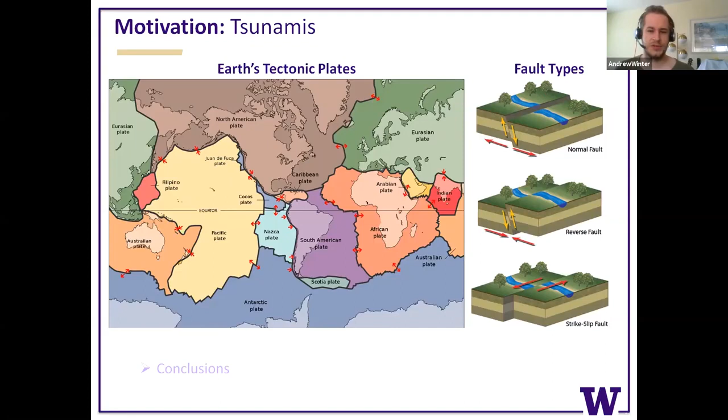So to begin with, what is causing tsunamis? I'm sure you all know, Earth's tectonic plates. And in particular, reverse faults are the main culprit of giant subduction zone type earthquakes that cause tsunamis. 88% of the world's tsunamis are caused by this type of earthquake. The remaining ones are mostly things like subsea landslides or even subaerial landslides coming off of a mountain down into a lake, usually.

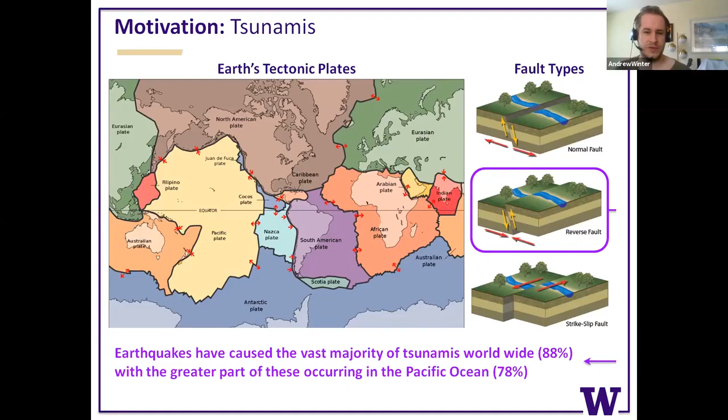But most of these occur in the Pacific Ocean, which is of concern to us where we live on the West Coast at University of Washington. And homing in more on that, the Cascadia subduction zone here, which stretches from Vancouver down to California, is the big issue in terms of potentially causing a future tsunami.

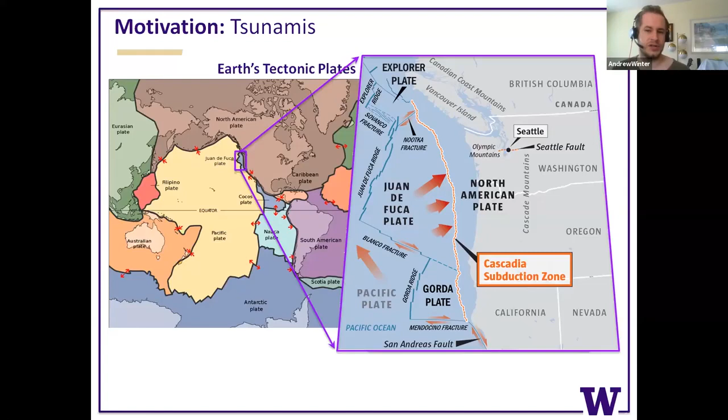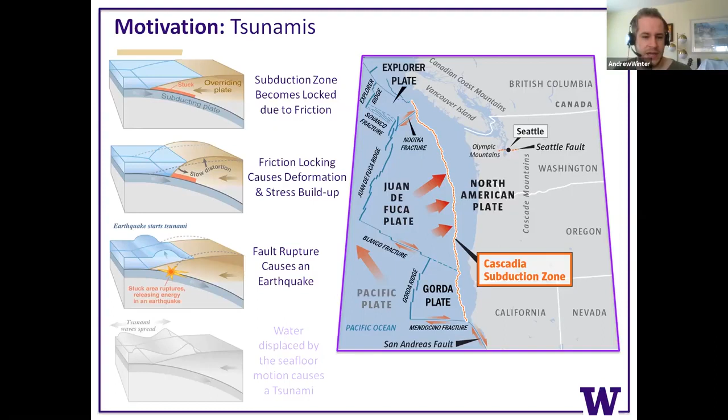As research shows, every roughly between 500 and 600 years, a giant magnitude 9 level earthquake should occur that would cause a disastrous tsunami. And since this fault takes so long to repeat causing an earthquake at that level, as this process goes on, the zone becomes locked, which geologists are measuring all the time to determine how much of it is locked. As this locking occurs further and further, the friction causes deformation and stress buildup in the plates of the earth. Eventually it slips and gives way, or maybe some partial fracturing of plate material at the interface. And finally, since the water is displaced, it moves outward from there as a tsunami, perpendicular to the fault. At the ends, you get more fringe, radial, circular propagation that's not as bad.

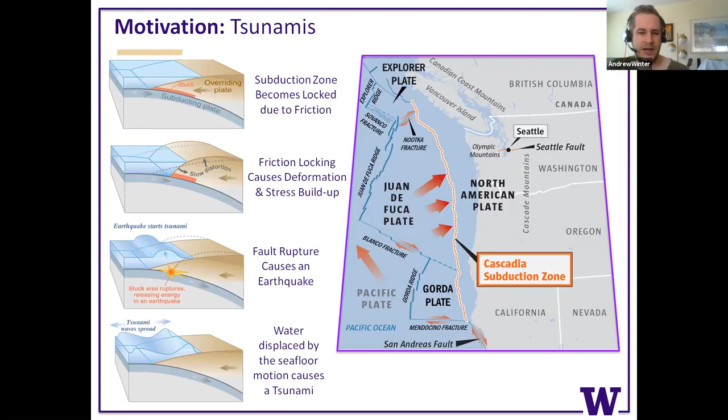In terms of what this can do to communities, these are some examples I have here from 2004 and 2011. You can see on the left tsunamis in conditions like this, where it's not such an urban environment. They completely wipe the map clean of all vegetation, and they ravage the coastline and completely change its profile. Also, lots of seawater is left behind on what could possibly be arable land, so it's hard to use, and all the small structures are completely wiped down or wiped off the face of the earth there.

Also in Japan, in the harbor here, you can see only a few of the larger, more strongly reinforced concrete type structures have remained. All of the other small timber or light frame steel structures have been completely knocked down by the inundation. So what we're aiming to understand is whether a small building that wouldn't withstand the tsunami on its own, if positioned behind one of these big buildings on the coastline, could survive if designed adequately for those loads.

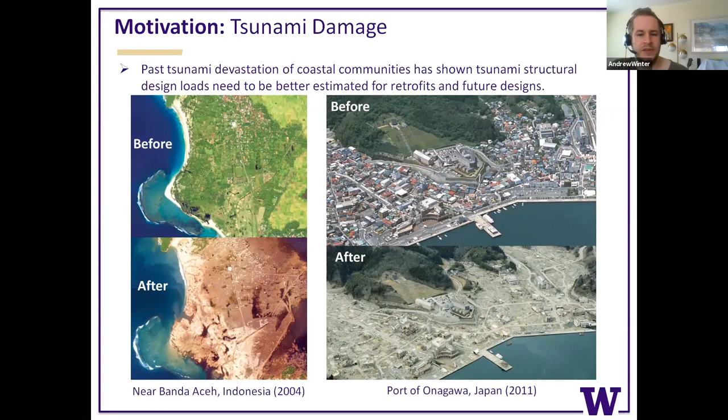Some people have studied this before. It's in ASCE 7 as of the last release, 7-16. However, the force amplifications provided there are not part of the main code. They're in the commentary, so it's not required for your design.

The other thing is there's no treatment of shielding effects—one structure hidden behind another, like I mentioned. That would cause a force reduction that could be very valuable in assessing whether your structure is going to still be there or not.

Channeling effects are considered in the code, but they only consider very symmetric configurations of structures. You can see on the bottom left, these little blocks in the yellow boxes are perfectly arranged on a grid, symmetrically spaced away from the test structure further onshore in the purple box. The same thing appears on the top right, where two symmetric flow blockages were channeling the wave toward a central structure.

So the things we aimed to do in our experiments were go beyond perfect symmetry conditions and also consider shielded conditions, to come up with a comprehensive design equation based on numerical model parametric study results.

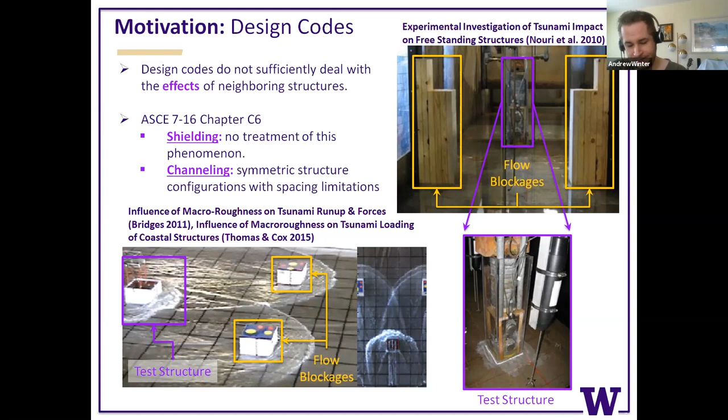Diving into the experiments, we wanted to determine flow shielding and channeling effects from our experimental data. So we went to Oregon State's Large Wave Flume in the Hinsdale Wave Research Lab.

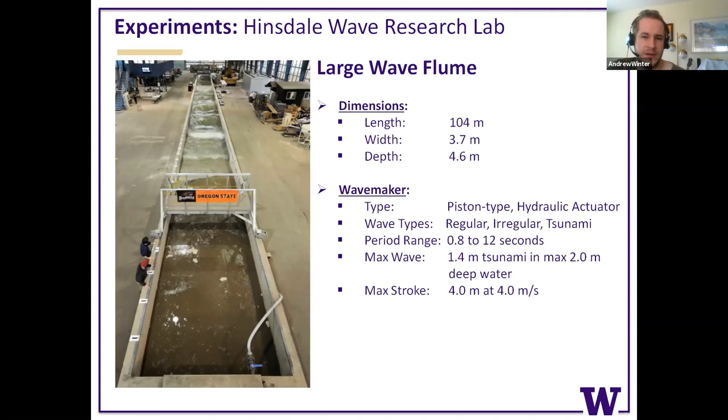We used a test structure borrowed from a previous experiment—a steel box with a reinforced frame inside. Even though it has a reasonably thick steel gauge plate on the wall, the frame makes it more rigid, so you're getting more of a fixed structure response rather than a very flexible one.

We had an array of locations where we placed pressure gauges in little taps along the sides of the structure.

Also above, there was this support frame that spanned the flume channel like a bridge. The overall top part connected to the walls, and this bottom part in the middle allowed translation in the wave propagation direction. There are two sets of frictionless slider bearings, so you can have translation either in the streamwise wave direction or in the transverse alongshore direction.

So hopefully we're isolating just the loads in those directions, barring whatever kind of friction is actually in there, since realistically there has to be some.

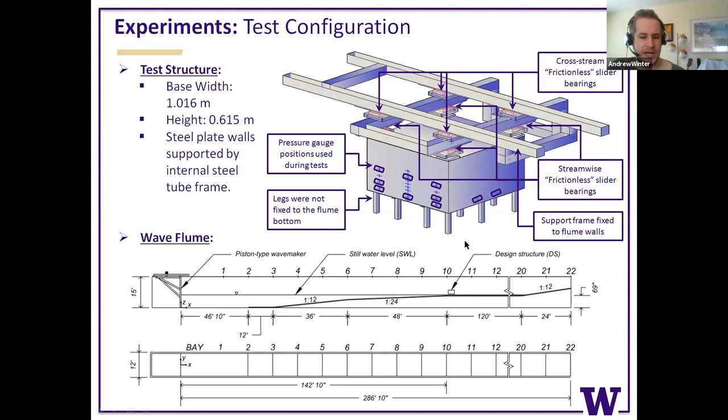You can see here our profile for our experiments. We had a two-slope beach coming up to a flat ground area, and the structure was supported on legs, which later in numerical modeling we ignored for simplicity's sake, so the mesh wouldn't have to be too tiny in too many places. But we'll talk more about that later.

The other thing is our measurement gauges. We used acoustic Doppler velocimeters to get the velocity field of the incoming wave. We also measured the free surface elevation with ultrasonic wave gauges and traditional wire wave gauges along the length of the flume and surrounding the test structure. All of these were used for numerical model validation later.

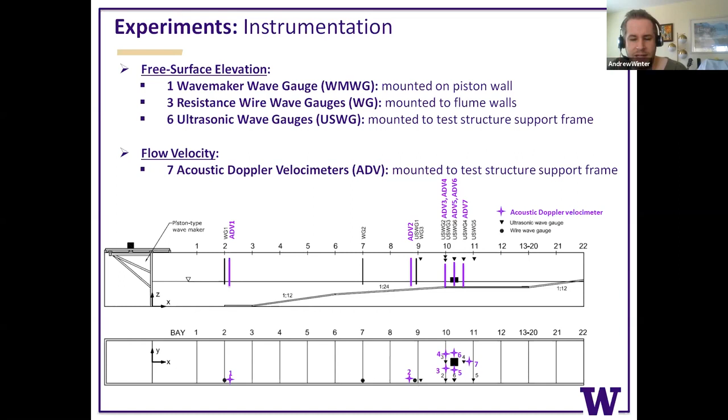You can see here where they're placed, surrounding the structure. The pressure gauges were concentrated mostly on the front of the structure because we were concerned about the wave impact in the streamwise direction, initially on the front. But we also placed gauges on the sides, the bottom, and the back to assess any twisting that might occur from asymmetric loading on the left or right, uplift on the bottom, and a resisting force on the back from water there.

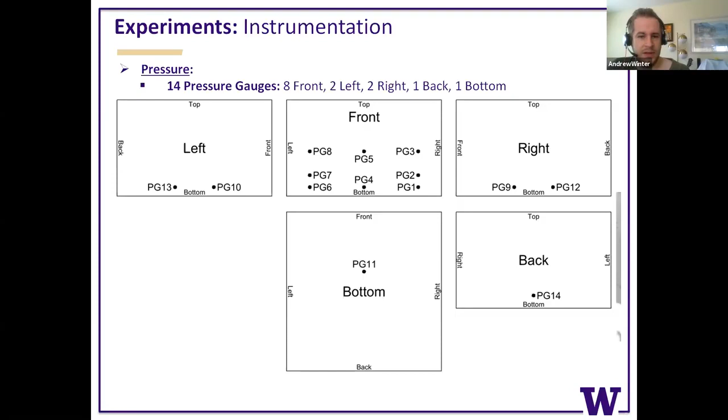You can see inside all of the wires coming in through here to the top to all of our gauges and our load cells. We did have leg load cells to measure loads on a couple of the legs, but they were so insignificant compared to the total load, we didn't really use those results.

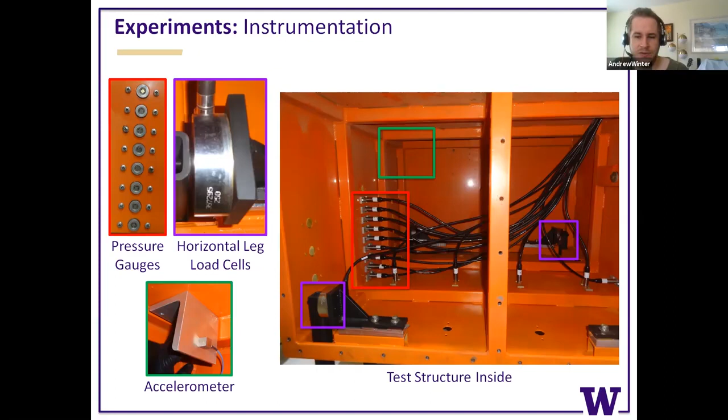We used the net streamwise force, which was measured by the back load cell. Then we had 2 load cells on the side attached to part of the frame on the right side. We also had 4 vertical load cells attached to the roof of the structure, so you could measure overturning and twisting in any direction as well as the vertical force.

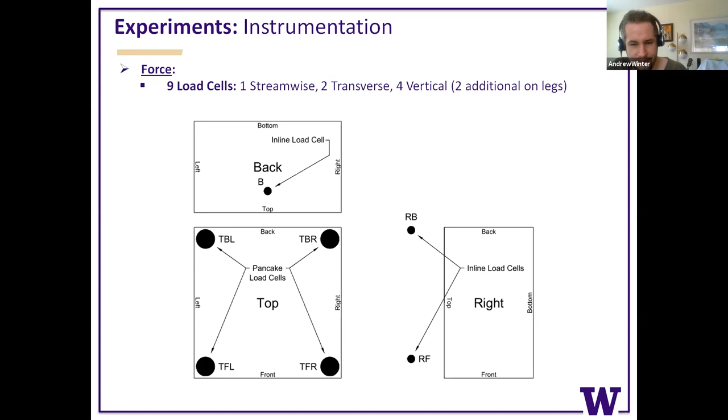We tested 3 wave types in total, but we neglected one of them because it was breaking right on the front of the test structure, and it seemed highly unlikely that would ever happen in a real tsunami situation. So we stuck to mostly testing these 2 waves, an unbroken wave and a broken wave, which maximize different aspects of what the wave maker is capable of in the Hinsdale Wave Research Lab.

The first one, the unbroken wave, you're getting the maximum piston strokes and the longest duration of inundation. Whereas the other one, the broken wave that we created, had reached the max velocity of the piston wave maker, but we were not able to hit the maximum paddle displacement due to the physical constraints of the wave maker — we didn't want to break it.

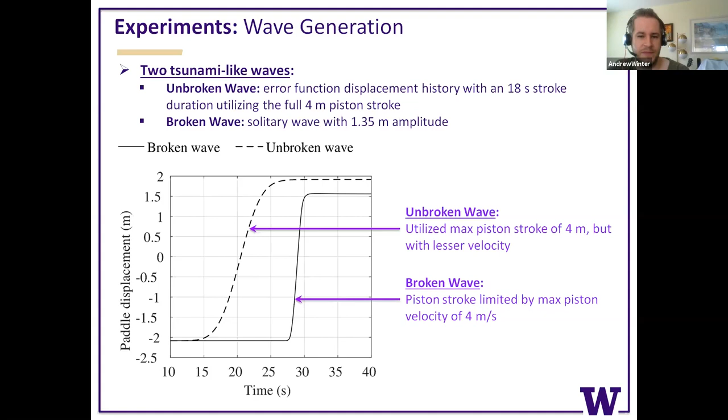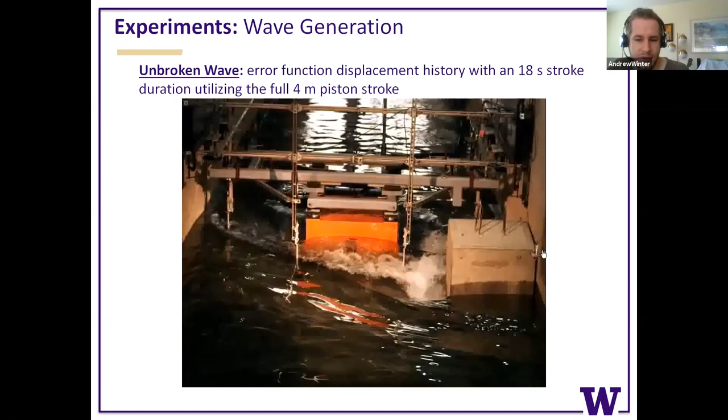Moving on to the broken wave, this one is going to come in as a fully broken bore already. The wave is broken halfway between the wave maker and the test structure to ensure that it's like a broken tsunami bore. It should be coming in the bottom here any moment.

Apologize for my colleague not hitting record earlier. Here we go.

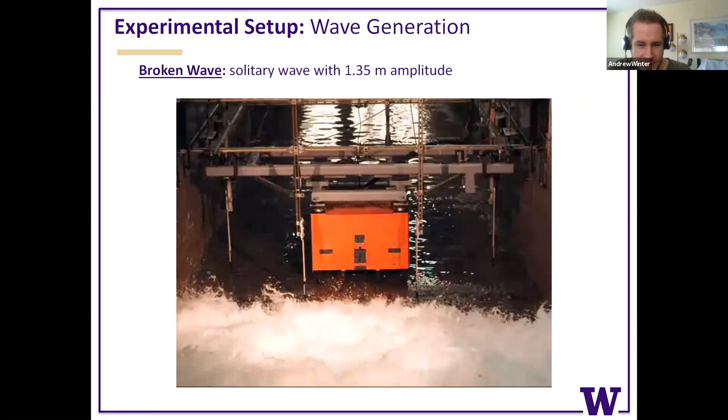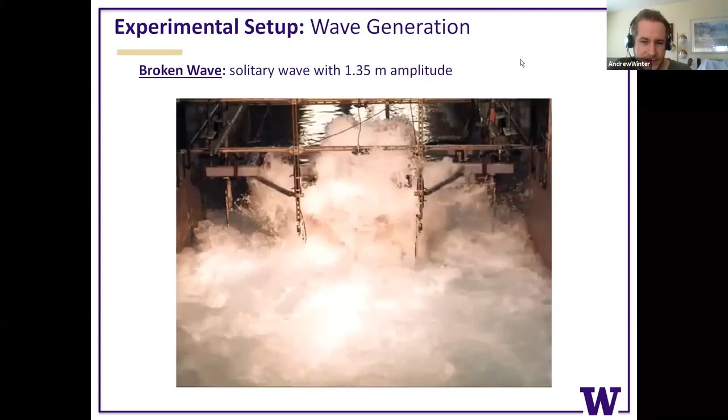Here comes in the big frothy broken wave, and this caused a huge slamming load and lots of splashing, which ended up being problematic for our ultrasonic wave gauges — you can see my mouse is right here, and the splash definitely douses it. We'll talk more about that later in terms of how that came out for our free surface measurements, but yeah, that's that wave.

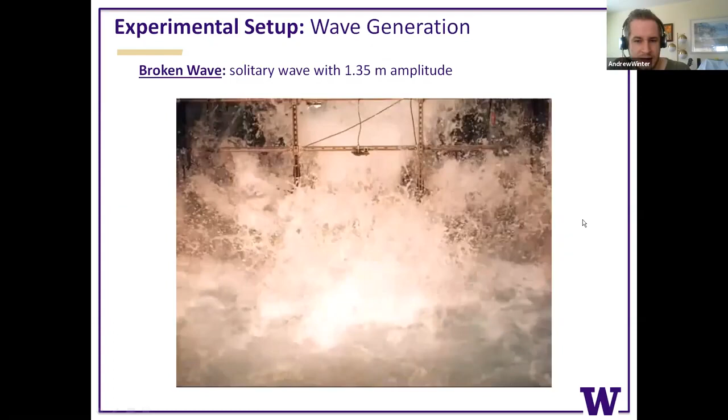The wave is going to get redirected at an angle a little bit away from the structure that it impacts first, the concrete block. So it's not going to hit head on the test structure as much as it normally would.

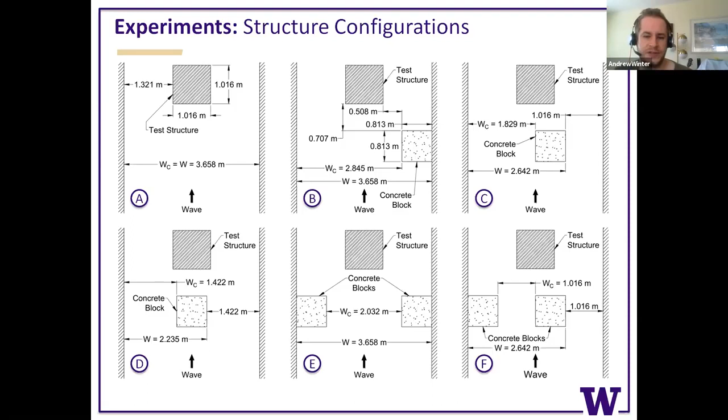Cases B, C, and D give different levels of blockage of the flow channel, and case E would be like a perfectly channeled case. So case E, you should expect to match ASCE results very well — same with case B, since it's not actually shielding the structure. But cases F, D, and C, where there is at least some shielding, if not full shielding of the structure, you're going to expect to see a much different result than what the code predicts.

The other thing is we then did regressions of the pressure field data to figure out these surfaces, which were used to calculate the force.

One thing that's a little confusing is that in each of the images of the test structure, the orange block and the gray concrete blocks, the horizontal or transverse y-axis is flipped from what it should be. So for instance in case F, you might wonder why the value is really high on the right side when it looks like it should be higher on the left side where there's no blockage. That is true, it should be flipped. This was just a relic of past figure making.

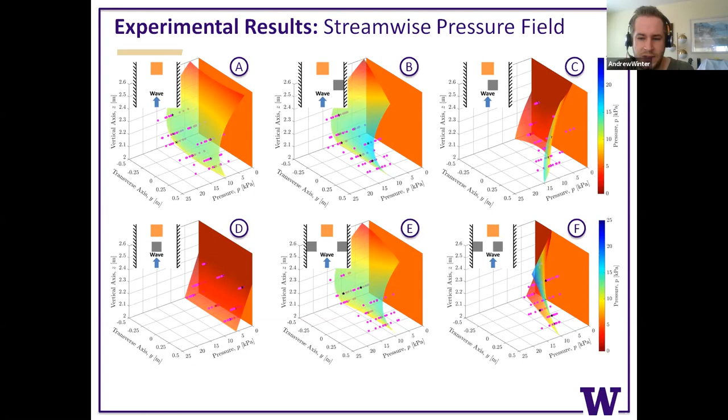But you can see all of the cases with shielding, like D, C, and F, definitely cause very large reductions in the localized pressure field. You also get things like in case F, where the channel between the two closely placed structures causes a very large increased velocity, and you get a very locally huge pressure field compared to the base pressure field, like if you look at case A. So we were trying to capture all of these effects: amplifications in pressures and forces due to channeling, and reductions due to shielding.

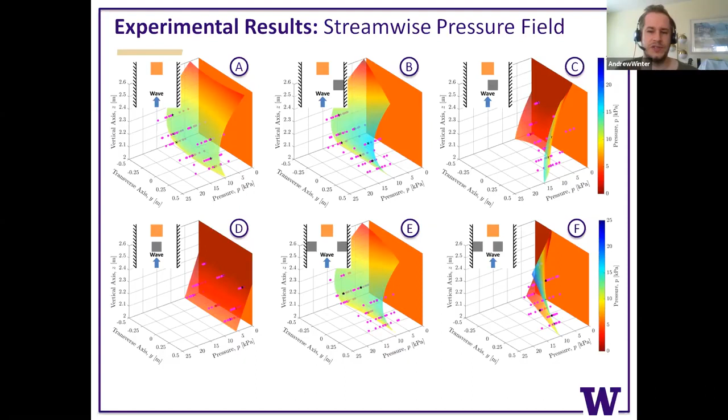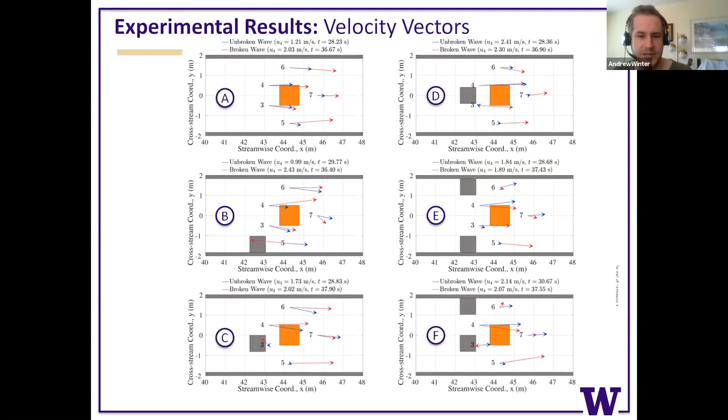You can see in a number of these cases where there is some channeling due to the neighboring structure, for instance case C and case B, you could compare to case A very readily and see that the broken wave velocity, which is of most interest since it's most like a tsunami, definitely got much larger. So not only did the forces and pressures experience amplifications, you can see it very directly coming from the velocities as well, which makes sense since the dynamic pressure depends on the square of the velocity.

Getting into what the code says about this, this was some research by Nouri in 2010 from University of Ottawa, which I believe was one of the experiments cited earlier in the slides. They developed a curve that tells you a force increase ratio based on how much the channel is blocked, but they also placed a bunch of restrictions on the distances between things in the configuration.

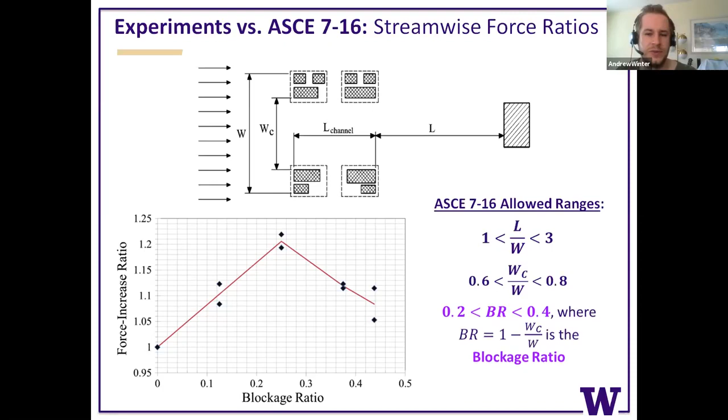For instance, you have to have a large enough separation L between your structure and the channel. Also, there's a restriction that the blockage ratio must exist between 0.2 and 0.4, which doesn't seem as widely applicable as you would like for a design equation. So we attempted to expand beyond that.

Just comparing the experimental results alone, you see, as I was mentioning, the unshielded cases B and E, where there's no gray concrete block directly in front of the orange structure, performed exactly as you would expect according to the ASCE results. Whereas anything with shielding at all, C, D, or F, was drastically reduced in terms of its ratio of force versus the case without any blockage. So this is what we're attempting to capture in our equation eventually.

Also, by doing that, we're going to expand the range in which our equation is applicable. We attempted to do a much wider range of distances, so very close structure patterns and very separated structure patterns, so you can have a very widely applicable result.

So just the conclusions of this: you get greater than 50% reduction in force for only 50% shielding of the front face of a structure. And in channeling, more or less, you just get increases due to higher velocities from a Venturi-like effect between pairs of structures or between the wall of the flume and a structure.

The other thing to note is even if you get a channeled velocity that's higher and could cause a higher force, it needs to be more directly aligned with the structure. For instance, case E has a larger force than case F by far, because case F may have channeling and a higher velocity than E even, but it's not directly aligned with the orange structure, so you're not going to get the full impact on the structure.

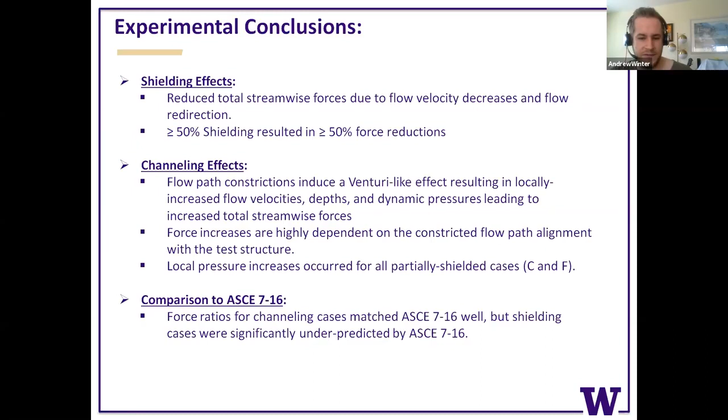So after we did all this, we wanted to develop a numerical model we could use for parametric studies that would expand beyond the range of conditions, so we could develop a force equation that was very widely applicable. For this work, we chose to use a 3D Reynolds-averaged Navier-Stokes CFD solver code and try to replicate our measured tsunami loads and free surface elevations as accurately as we could.

We used the OpenFOAM software library for this. It's a finite volume method-based solver using the volume of fluid method for free surface tracking, so it's a two-phase air-water type model.

Additionally, on top of OpenFOAM, I used work from Pablo Higuera, who I believe is at University of Auckland now -- he was from IH Cantabria in Spain -- and he developed during his PhD this Olaflow package, which is basically a coastal engineering add-on to OpenFOAM.

That allowed very easy implementation of the wave maker boundary condition that I needed.

For turbulence, we settled on using the K-omega shear stress transport model developed by Menter, I think in '92, for its ability to deal with extreme flow separation off of a bluff body like this box. We'll talk more about that later.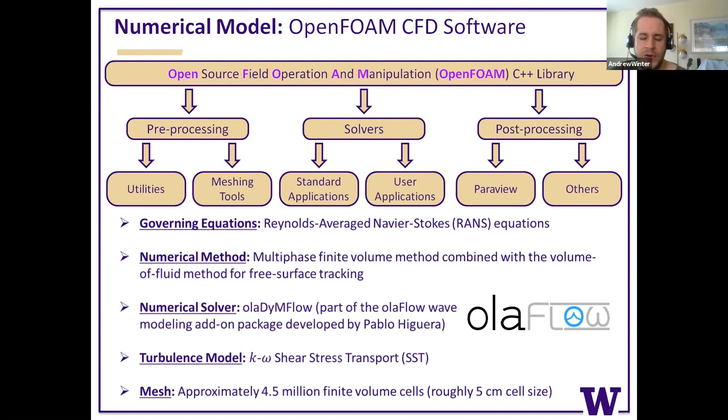In terms of how numerically expensive this is, we used roughly 4.5 million cells per case, so they weren't that bad. We could run them on about four nodes with 16 cores each, which is what I did all of my jobs on, more or less.

The main criteria for setting up a good model, which took the vast majority of my effort during my PhD, was getting the mesh right. And getting the mesh right involves reducing the non-orthogonality and the skewness of the mesh.

In the bottom right here, you can see the worst possible case: there's a difference between the cell edge center and where a vector connecting the cell centers crosses that line, and you also don't cross that line perpendicularly, so that's bad. You want it to be like the top left, because all of the finite volume schemes in these codes were derived assuming that this type of condition is what you were working with.

They didn't imagine you were going to do these free meshes that were so crazy. OpenFOAM does have internal correction factors to deal with this, but they're only going to get you so far -- you want to avoid this as much as possible.

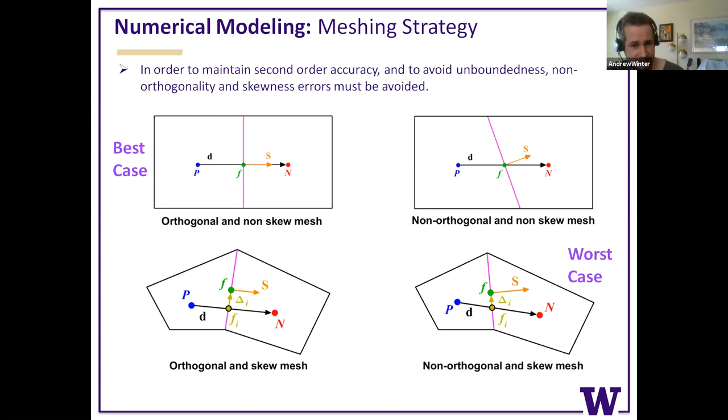So to do this, this is my meshing scheme in the flume, chopped up into 3 chunks here. The initial part, the horizontal dynamic deformation, is what the Olaflow solver is doing -- it's moving the left wall according to the piston wavemaker time history of displacement, and that part of the mesh gets squished.

That's why if you look at the delta X of those cells, it's a bit larger than to the right. So by the time it's done getting squished due to the piston wall motion, it is equivalent in size to the ones to the right, outside of the red region.

In terms of refinement, I used uniform grading from the atmosphere and from a lower boundary in the flume up to the free surface, to get nice refinement where the wave is going to be passing through and have good resolution there.

Horizontally, I graded it from the end of the first beach slope toward where the structure is going to be, in the purple region, and then expanded it again toward the end of the flume where I don't care about the solution being as refined. I just want to reduce my cell count, since that's after the wave has broken and hit the structure. Initially everything started from 10 centimeter size, and this is about a 100-meter flume roughly.

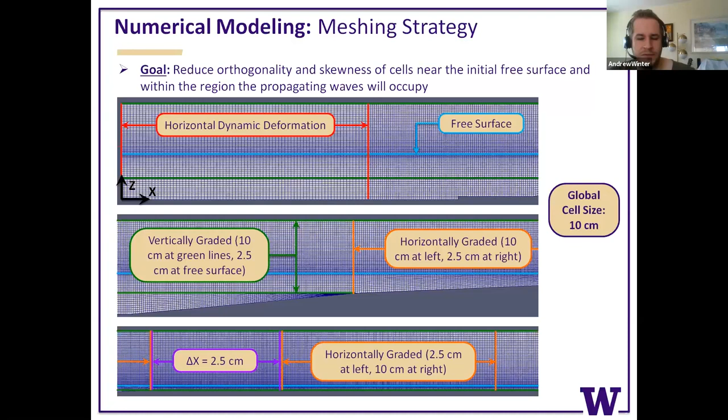This is just a close-up of what the structure ended up looking like. This is the concrete block in case D, right in front of the test structure, just as an example. So it goes all the way to the ground. The test structure behind it does not go all the way to the ground, and I did not model the legs. The proportion of the load on the legs was so minimal compared to the overall structure that we opted to reduce the numerical solver time and complexity of setting up the model by eliminating the legs, since the mesh would have to be so much smaller to conform to their shape.

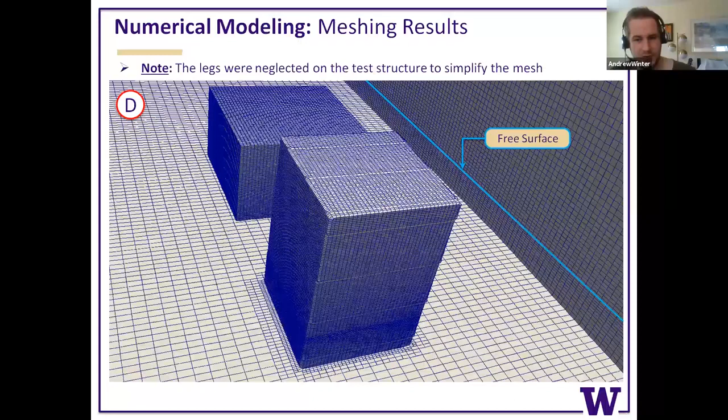In terms of setup of the model, getting your initial conditions is very important. In particular, the turbulence modeling aspect of setting up the numerical solution was one of the more difficult parts to get right, in addition to the mesh.

I did this by taking experimental measurements from as early as possible in the wave. The first ADV, acoustic Doppler velocimeter, along the length of the flume, took measurements of the velocity histories from there, and then we calculated the ensemble averages. That's what the green U, X, and U, Y in the little angle brackets are.

Then for turbulence, you care about the fluctuating velocities. So you subtract the mean from the total, and you get the turbulent quantities. Then you can calculate your turbulent kinetic energy, which is just 1/2 times the sum of the squares of the velocity components. Also, in most of these models, they're 2-equation models, so you have to have the dissipation rate as well, the epsilon value. This is just an equation from turbulence theory, so you plug in your numbers and crunch it out.

Finally, for the K omega SST, you need the omega value, the turbulence frequency, which again you calculate from your equation from theory. The one or two big assumptions in all of this were that we neglected the Z velocity due to extremely noisy, erroneous data measured by the ADVs, and that in the initial part of the wave, most of the motion is purely horizontal translation.

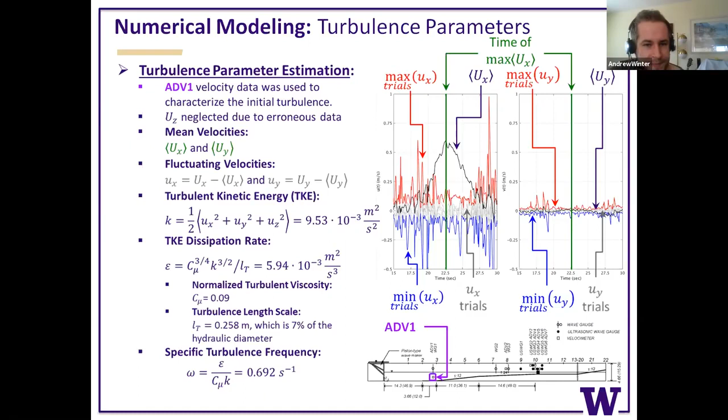In terms of which model we used, we did test a range of models to see which gave the best results. In previous research I had done on bridge structures, the standard K-epsilon model worked very well. But honestly, after doing all of my PhD research, I feel like that was a bit lucky and a fluke, since this model can't handle flow separation well, and it over-predicts the turbulence kinetic energy, the K value, in stagnation regions. So on the front of the structure, where the wave is going to impact right in the middle, the K starts to build up and gives erroneous answers.

So that's not a good model to use. We also tried the K omega SST and the nonlinear realizable K epsilon models, which are available in OpenFOAM, and they gave very good magnitude results, but the nonlinear realizable one was off in time. So we selected the K omega SST.

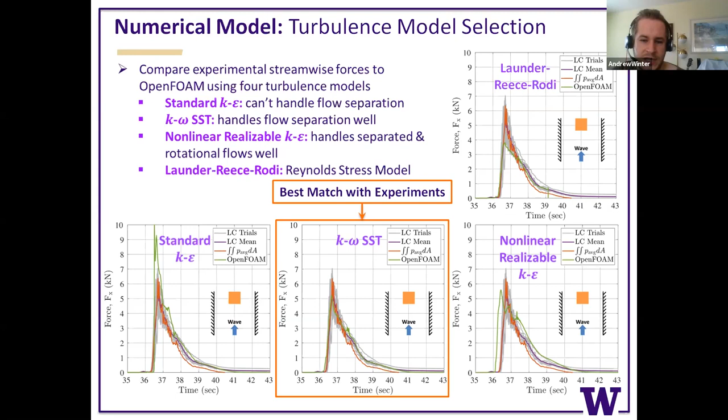The one big disappointment here was the Launder-Reece-Rodi model, which is a Reynolds stress model, theoretically more physically correct than any of the others. There are more approximations built into these other three models that are used. The difficulty though is getting the initial conditions correct, and you have to make some assumptions unless you have a lot of measurements, which we did not have. So the assumptions did not work very well, and I would recommend sticking with K omega SST for applications like this.

Here's a little sample of what OpenFOAM can do for you. You can see on the left, the wall moves and creates the wave. This is the broken wave, and it comes in, and right about here it's more or less a fully broken bore, with impact on the structure. All of these visualizations were created using ParaView, which is also free software.

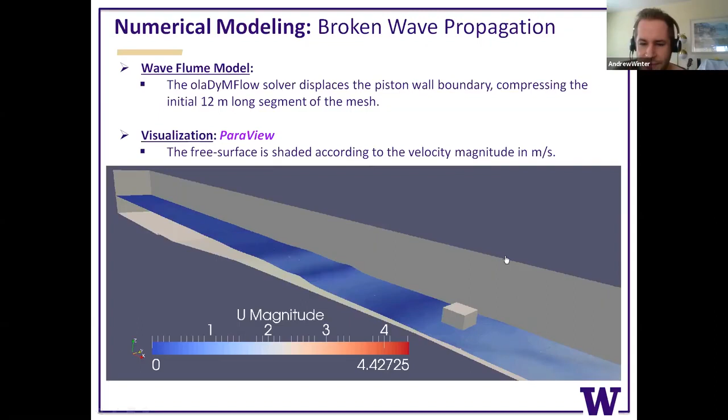Here's a close-up from the front. The wave comes in just like the video from the experiment earlier, and you can see a very similar result, which makes sense since the forces we got were very similar.

Comparing the experiments to the numerical values, in this graph the green is OpenFOAM, orange is the integration of the pressure gauges, and the purple line is the mean of the load cell values from different trials in these configurations. The gray lines are all the different trials of the experimental results, plotted to show you the range of experimental variability.

In all of these, the OpenFOAM curve at the peak, which is the main value we care about since we wanted to estimate the maximum impact force as best as possible, is definitely within the gray range of variability, and also comes out quite close, especially in A, B, C, and E, to matching between the numerical and experimental results.

You can see the free surface on the right, looking at the unbroken wave over here as an example, which also looks very realistically similar in terms of the elevation it reached on the structure.

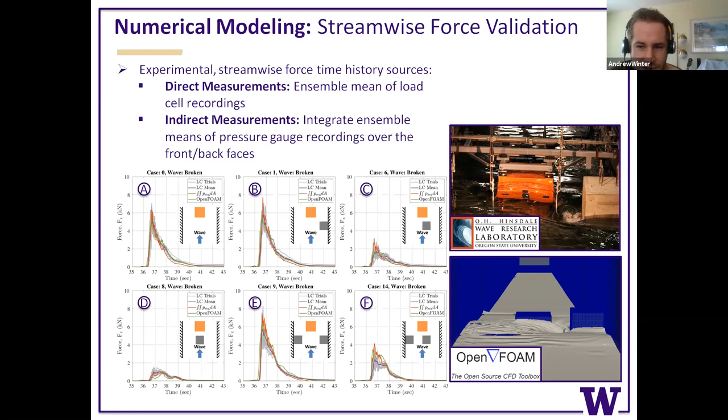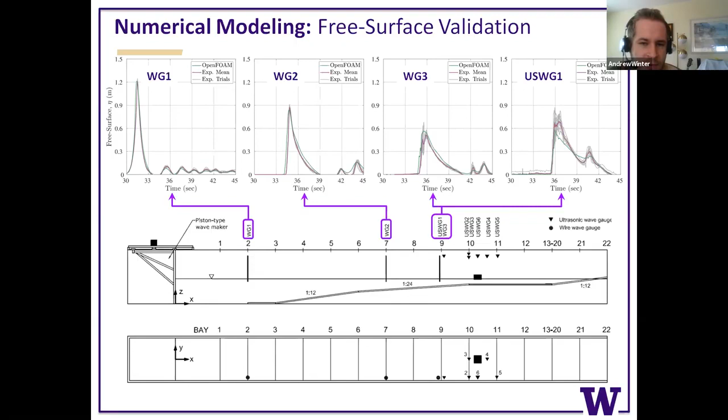As I was mentioning, in terms of free surface elevation, you can see here as the wave is propagating along the flume, OpenFOAM - the green, purple, and gray curves - match quite well.

Near the structure it also matched quite well, but it was much more difficult to compare the experiments to the numerical results due to the splashing that I showed you earlier in the broken wave video.

You can see in the front, all of our recordings at that ultrasonic wave gauge were completely corrupted, and the values were like infinity or 0 or negative 1, things that made no sense.

I tried to salvage some of the results you can see at gauges 2, 4, and 5. But even though most of them were okay, there's still some erroneous results that messed up calculating the average.

Although you can see the green curve fits through the experiments everywhere that those spikes in the data are not occurring. Even behind the test structure at gauge 6, there's quite a good match between OpenFOAM and the experimental result, which I thought definitely showed that the turbulence model is doing its job - in a flow-separated region, things are still coming out pretty accurately.

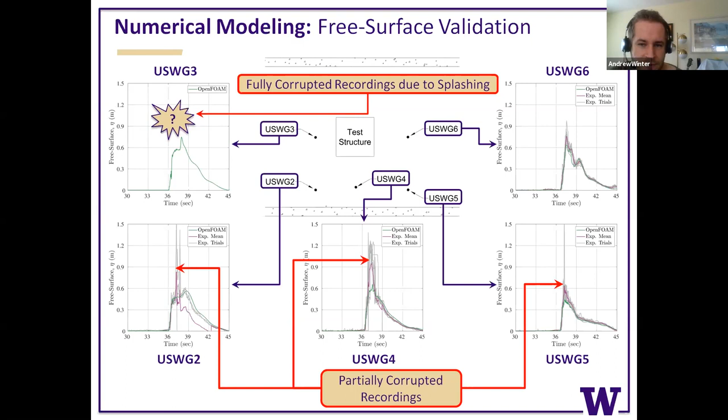So overall, as a conclusion here, using the 10 centimeter global cell size was good enough, and reducing it down to 2.5 centimeters wasn't necessary - you're not trying to resolve super fine boundary layer results here. To get the net impact force correct, you don't need to go as fine. That would be, I think, one of the big takeaways.

Also, out of a lot of the standard turbulence models that you might use on this problem, the K-omega SST model was the best option.

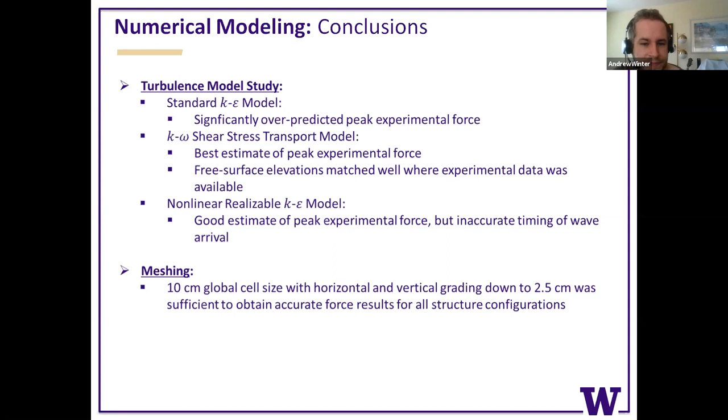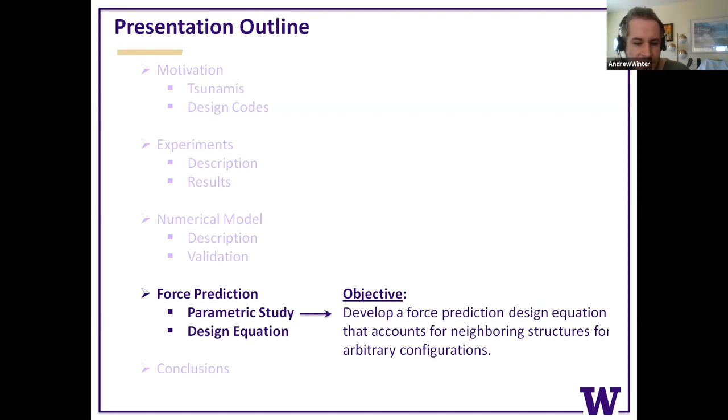So for developing our force prediction equation, what did we do? We took this validated model and started moving the neighboring structures around in space to get a bunch of results that we could then use to figure out a design equation for the streamwise force. Our goal was to vary the location of a neighboring structure here, the gray blocks, relative to the design structure or test structure, the orange box.

So we just chose a wide range of X, Y coordinates here, which define the back position of the neighboring structure relative to the design one and the alignment of their center lines.

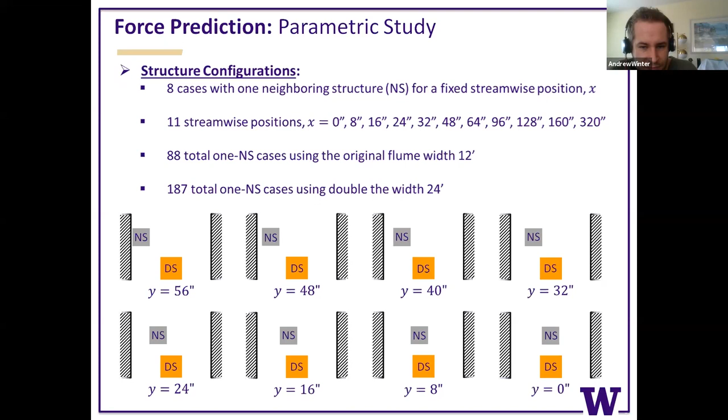We had 88 one-neighboring-structure cases, and we also had 187 more cases where we doubled the flume width to see if the walls were having any effect on the simulation, and also on whether the experimental results were accurate or not.

Our concern, expressed in an image maybe better than my words, is that if you have a neighboring structure near the wall, you get flow behavior that's not necessarily the true flow behavior around a neighboring structure with no wall over there. In real life there wouldn't necessarily be a wall if the neighboring structure is supposed to be the only thing changing the flow. Since there's a stagnation point at the corner of the neighboring structure and the wall it's touching, it's effectively, in concept, like having a double-wide neighboring structure.

So we were concerned how different the forces would be if you took away the wall. We doubled the flume width to move it far away to the left and right, and see what would happen to the results, just to test if our results are realistic enough or not.

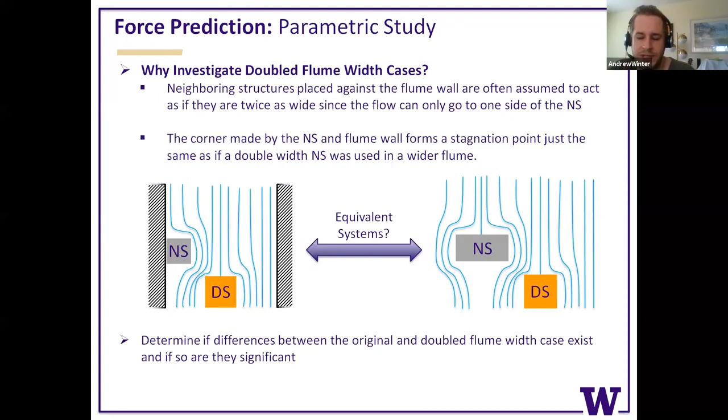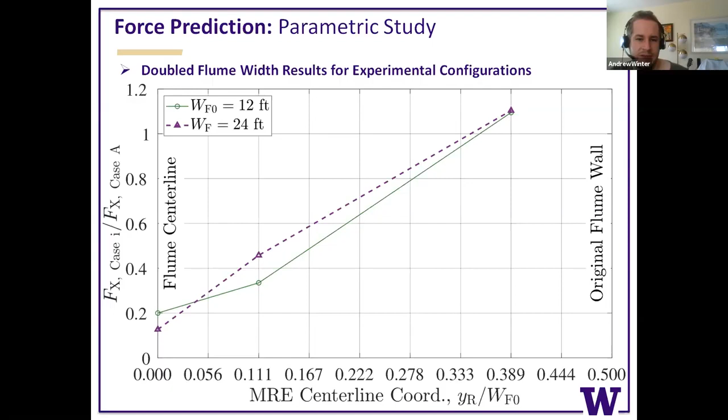To do that we needed a very large range of high-performance computing resources. We used local resources at the UW - Hyak is our HPC cluster there, and I used 4 different queues within that. Also at TACC, I made good use of the SKX normal nodes to do 2 neighboring structures. Those results aren't presented in this presentation, but we're currently working on augmenting the design equation to account for 2 or 3 structures.

So we ran a lot of different cases. What might be important to you is that on TACC it took 1 to 3 nodes, 2 to 3 days, to run these 4.5 million cell cases. Hyak is maybe not as relevant, but it was a similar number of nodes, just slightly longer time.

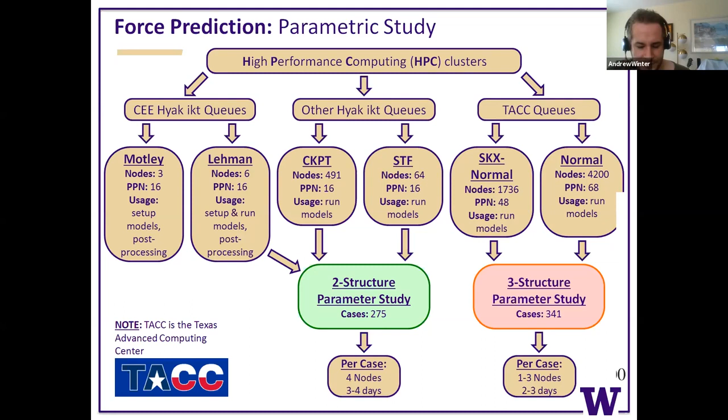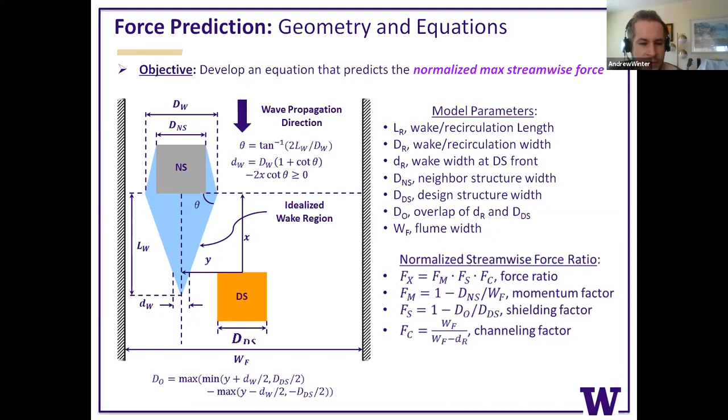What did we do with all of this data? Like I said, we wanted to get a wake width and a wake length - those were the two unknown things in the geometry, going back to our configuration of the structure. We didn't know the width and we didn't know the length of the wake, and we let error minimization of the forces between the prediction equation and the OpenFOAM results help optimize those.

So what we did was we ran a least squares sum minimization of the error of the force difference between the model equation and OpenFOAM, our validated OpenFOAM model. We found that the ratio of the wake width divided by the size of the neighboring structure, which is what these R numbers represent, came out to be around 1.2 to 1.1, and about 4 to 5.5, depending on whether you had the original flume width or the doubled flume width.

We wanted to pick nice engineering values that didn't have too many decimal places, but also encompassed both of these results quite well, whether you have a wide or a skinny flume. So we opted for just picking 2 values, which we'll show on the next slide.

But I wanted to explain here first, before we dive into a bunch of curves, how are we presenting these results. Each of these black points represents a case, a different configuration, and those are the actual OpenFOAM results.

The dashed lines, the blue, green, and purple, represent different factors. The green is the shielding factor. The blue is the loss in the momentum factor, and the purple is the channeling amplification of the force factor. The red is the product of those 3, the total force factor.

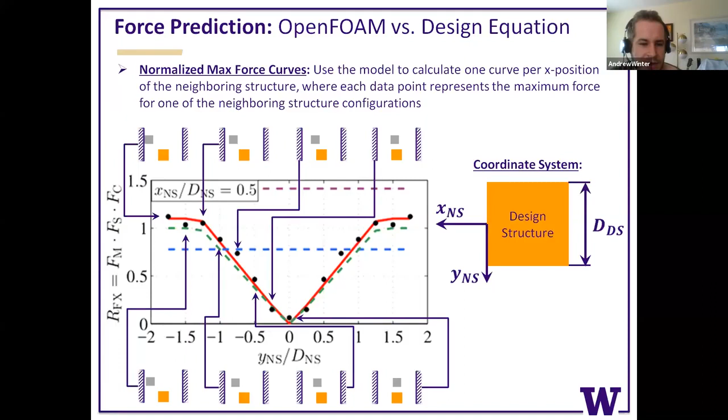So you can see our least squares minimization of the error is just trying to fit this red curve as best as it can through the black dots.

So as you go farther and farther away, you get closer to a more uniform field. The wake has enough time to reorder itself, and it's reduced in magnitude maybe, but it's not varying as much. As you get closer, you can see the shielding really takes effect and reduces the force in the middle a lot.

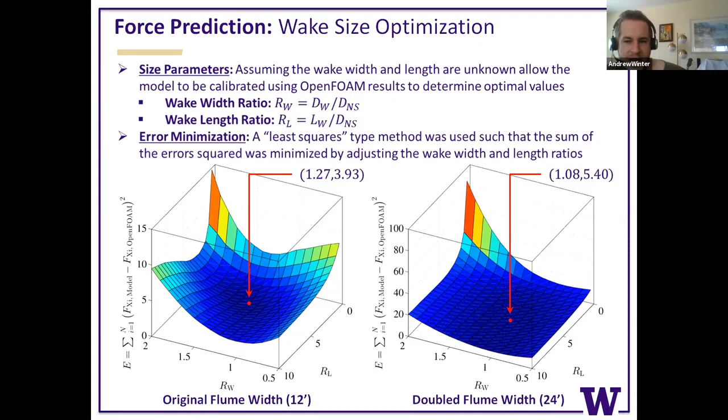These ones use, like I said, a sort of universal set of values that were rounded off to fit both cases. So instead of using either of the 2 more detailed values, we settled for something in between. We picked 1.2 for the wake width amplification, and we picked 5 for the wake length factor.

Also comparing the results for the doubled flume width using those same universal values for both, you can see the case matches quite well. In some instances, in the doubled one, you can see a lot of the OpenFOAM results, the black dots, are below the curve.

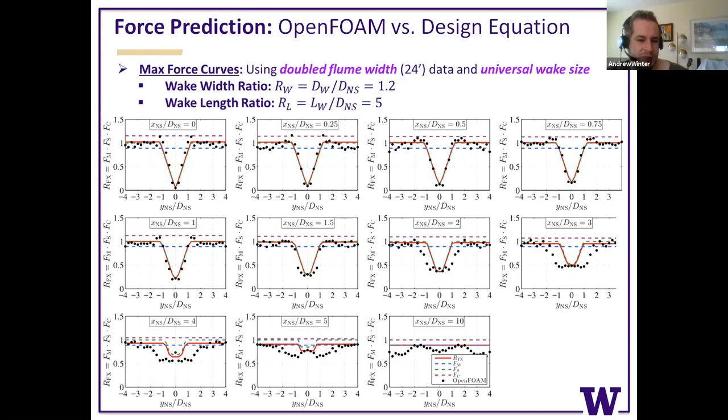But that was not so concerning to us, because being above it, those points, is conservative in terms of predicting the force. So we let that go and said that was okay.

The last thing I want to talk about is we compared our results also to a more realistic physical approximation, instead of coming up with these 3 factors in an ad hoc fashion and then optimizing them. This paper I'm mentioning, on the dependence of square cylinder wake on Reynolds number from 2018, shows depending on the initial Reynolds number of the incoming flow, how big you should expect your wake to be.

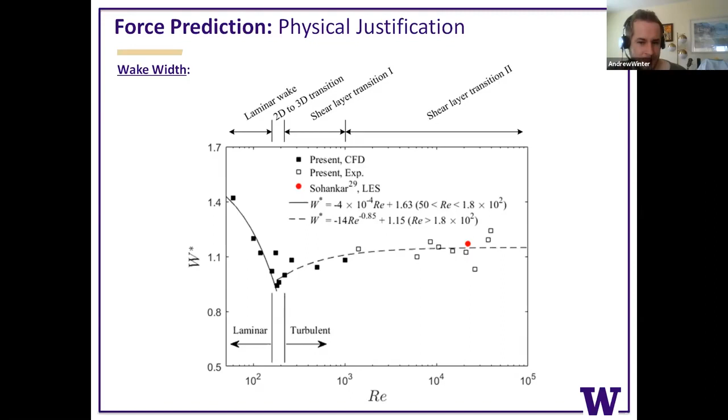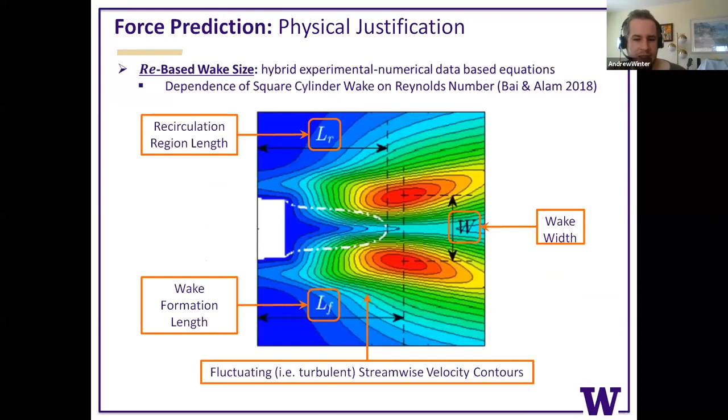But as you get farther away, the wake length is predicted to be very small by the Reynolds number only approach from the paper, and you can see it quickly goes to a perfectly horizontal line, meaning there's no overlap or interaction of the wake with the design structure. Whereas in the actual OpenFOAM results, there's still some interaction for much longer. So this case doesn't exactly match perfectly, but there's a lot more complexity in the interaction between the two structures than there is in a model like this, where you're just taking one structure by itself.

So without further research, we're chalking that up to the interaction causing this vast difference in the wake length.

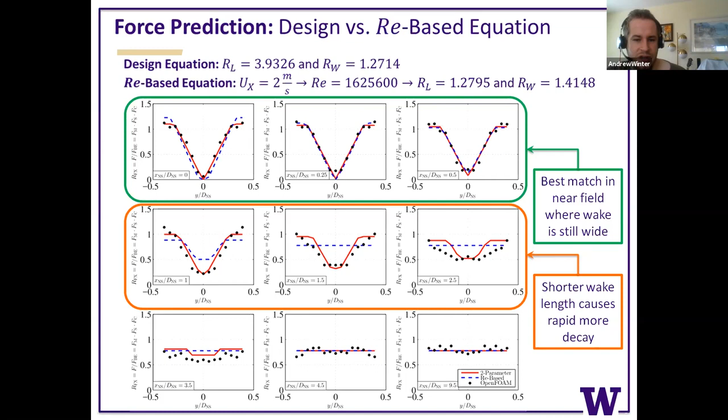So overall, what did we come up with here? We came up with three factors: a momentum factor, a channeling factor, and a shielding factor, the product of which gives you a force amplification factor. All of these can be estimated based purely on the geometry of your situation, making it simple to figure out what your neighboring structures are, what your channel width is before, and what your channel width is after the neighboring structures, and estimate the force that way.

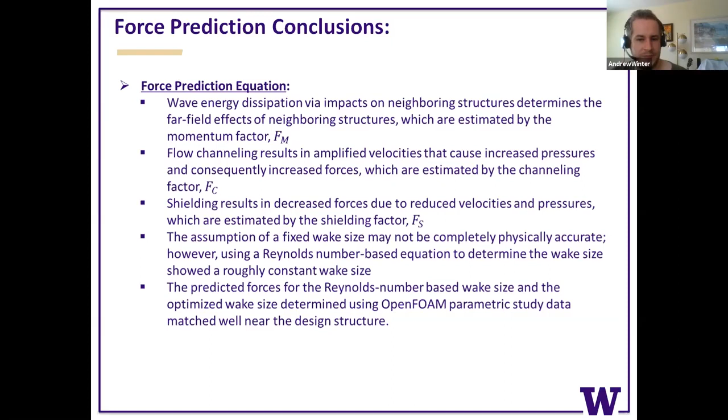We also showed that the OpenFOAM model was able to very well match experimental results and then be used for the parametric study to get this equation. Finally, using a purely Reynolds number based approach from experimental and numerical studies of a wide range for a rectangular structure, the results matched quite well in the near close separation of the structures, but as you got farther apart, the wake interaction was not captured well by that. So that requires some future work there.

And in terms of our conclusions, what did we come up with? We found that general channeling is going to result in increased demands due to increased flow velocities and depths, and this matches well with ASCE 7. However, shielding effects cause decreased structural demands due to flow redirection being not oriented at the structure anymore, and velocity reductions, and this is not accounted for yet in the design code.

We also demonstrated that using a code like OpenFOAM shows that CFD methods can very accurately replicate the experimental results of a tsunami-induced load scenario, even without an extremely fine mesh. So that's very beneficial for performing future parametric studies. Overall, the most important thing was we came up with our modified design equation capable of predicting the force amplifications and reductions at the same time over a wide range of positions.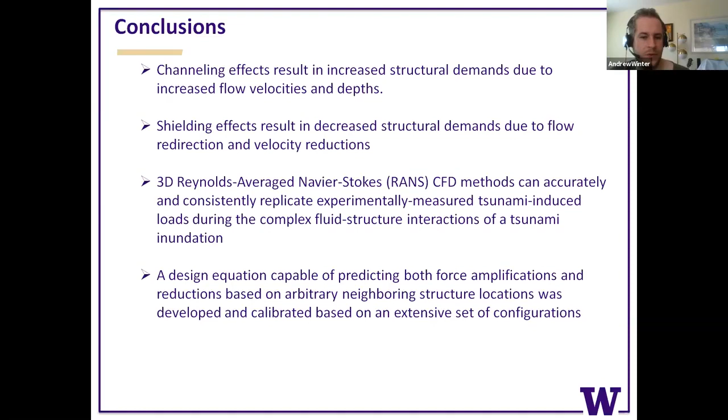And the last thing I'm going to say is what I think future work in this field could be, that would be good to do. This was all done for an elevated structure, so clearly this should be investigated for a non-elevated structure, something that goes all the way to the ground.

The other main problem here is the lack of a variation of the waveforms. You're not doing any sort of a probabilistic tsunami design scenario here, you're getting it to work for one wave, which is not terribly realistic in the grand scheme of things. This is why I think in the future, the way to go forward is using model order reduction techniques, which have already been done for tsunami inundations or things like blood flow in arteries, where you have very complex fluid dynamics that you can reduce down to simpler ones.

The other thing you could do is hybrid modeling, where you take a shallow water equation and propagate everything right up to the structure on shore, and then do very small models for a range of initial conditions.

Also, staggered positions of neighboring structures is important. Everything we did was just in rows, horizontally in the y direction. That's been shown by some people at OSU and other universities to also have a big impact on the flow redirection.

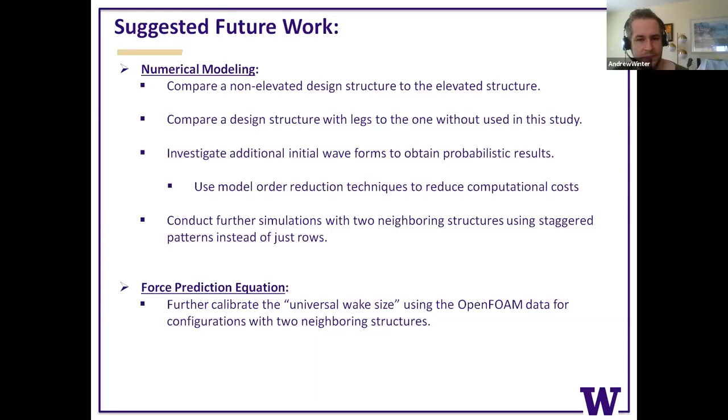So thank you for your attention, and I look forward to your questions.